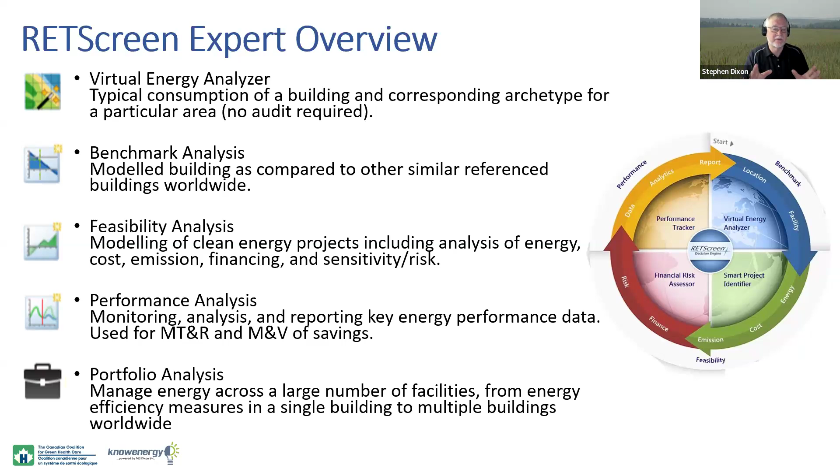It can interact with utility data. It can interact with meters in your building, right? And then it can produce output in many different forms for you, some of them where you hit a button and get a result, or other ones which are completely customizable. You can create dashboards for it.

RETScreen can work with many different project types. A lot of people say, well, can I do this? It's really just a matter of trying to figure out how to use the tools with RETScreen. There are very few projects that I find, over the years, you can't do with RETScreen. Now, it may depend on how deep you want to go.

So maybe I simply want to assess the first pass pre-feasibility of the project. There's probably tools to do that. Then I maybe would hand it off to another person or another tool to go deeper. But in many cases, you can go deeper with RETScreen. So you can do the benchmarking, the pre-feasibility, feasibility, and even the implementation, and then the performance or monitoring and tracking of that project over time.

So many facilities can be tracked, but virtually every different type of system in a healthcare facility is something you can look at quite closely. There are lots of internal databases to make your life easier. There's product databases with equipment and performance characteristics, and there's cost data for those things.

So if you're doing a project, what if I change this to that? Oh, I'm going to pull up a ground source heat pump, an air source heat pump - there are ways to cost that within the tool.

You eventually want to go out and get it costed properly, with cost estimates, engineering, and so on. But to begin with, to get that first pass, does it make sense to do this?

A lot of the data is already in RETScreen. Climate data, how cold or warm it is outside, the external conditions on a long-term basis, which we use for feasibility. Weather data, which is what we use for tracking actual performance month over month. If you're into water power, there's also hydrology data in there. Likely you won't be touching this in a healthcare facility, but it is there.

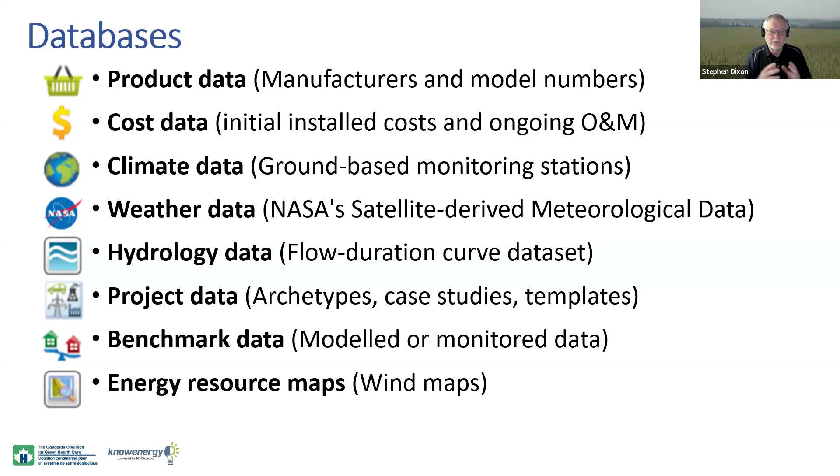You'll definitely want to look at solar, and RETScreen's links to the real-time NASA database for weather will actually help you quite nicely. So lots of resources. RETScreen wants to make itself, and I think has successfully made itself, the hub as a tool, and bring lots of different things together. So it is a big toolkit, there's a lot of stuff in here. If I had more time, I would spend some time with it.

Now, how can you take a quick look at RETScreen? Just kind of look at some of the things I'm going to talk about today. Well, you don't even have to spend a cent to do that. You can go to the RETScreen website - Autumn will be sending some links out afterwards if you don't know where to go, www.retscreen.net. You can download a copy of the latest version of the software, we're up to 9.3 now, and you can play with it.

Now, will you be able to save? No. Will you see all the detailed features? Not necessarily, but you'll see enough that I think you can get a sense of whether it's useful to you. On top of that, Autumn will be sending you a 30-day license for the professional version, which means everything is enabled - you get a chance to play with it, look at it, see what you think, and make a decision as to whether you want to buy it.

So, basically the purchase is about $860 a year subscription, and it can be used by multiple people in your organization or across multiple sites if you've got multiple buildings or sites within a healthcare network. So it can be used in that sense, and those arrangements you can make with RETScreen.

All right, lots of learning resources built in - case studies and templates. There's a place on the main screen down here, it says case studies and templates. You click into there and you get a list of case studies, and there's a little search bar. You can search case studies, which are real projects implemented with RETScreen, or templates, which are examples of things that maybe we didn't find a real project for but created a hypothetical example for - one of those on the right-hand side is a feasibility template for putting a variable speed or variable frequency drive on a fan in an HVAC system.

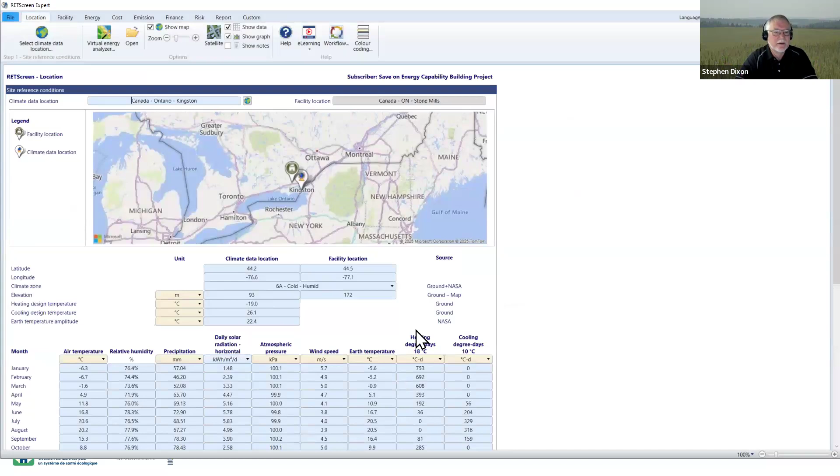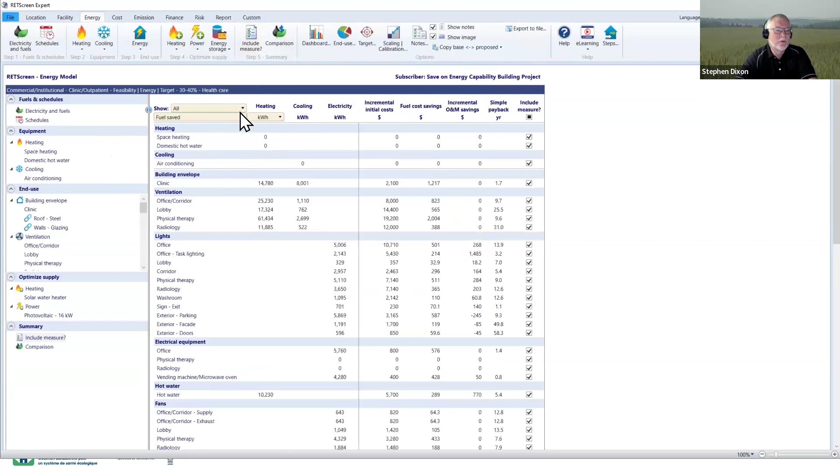So let's say we were looking at the office and corridor HVAC system. We can get into ventilation, and here's a specification of that system. We've got a complete building analyzed, the base case and the proposed case. So every one of these screens, if I click into the building envelope, I have the base case, the way it is today, and the proposed case, the way we propose it to be.

You can play with this and create projects that improve insulation level. In this case, we've increased the solar shading on this facility to reduce heat gains in the summer from the sun. There are lots of really cool things you can do to build out an improved or proposed case. Once you've created your proposed case, you can look at the emissions reductions—in this case, even though it's a 40% energy reduction, it also turns out to be almost a 50% carbon reduction. The green is the reduced carbon.

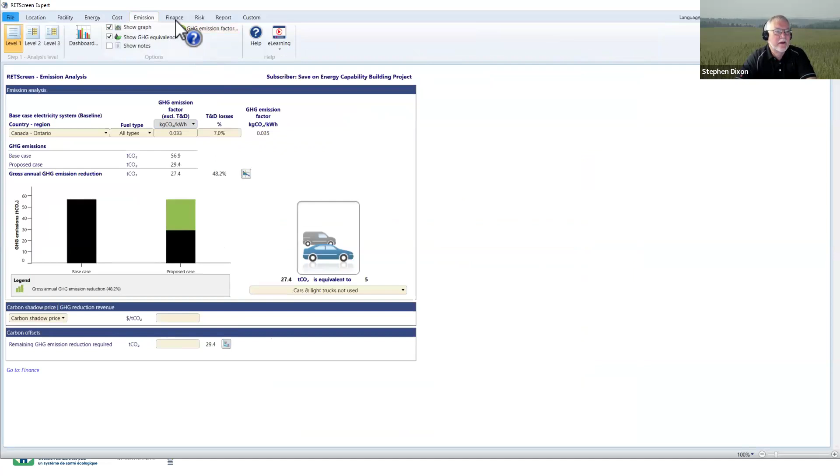Then we can do a very detailed financial analysis, going well beyond simple payback. Some projects really aren't best evaluated with simple payback anymore, so we use present value analysis, where we can calculate things like the internal rate of return or the net present value—or the one I like, the savings to investment ratio.

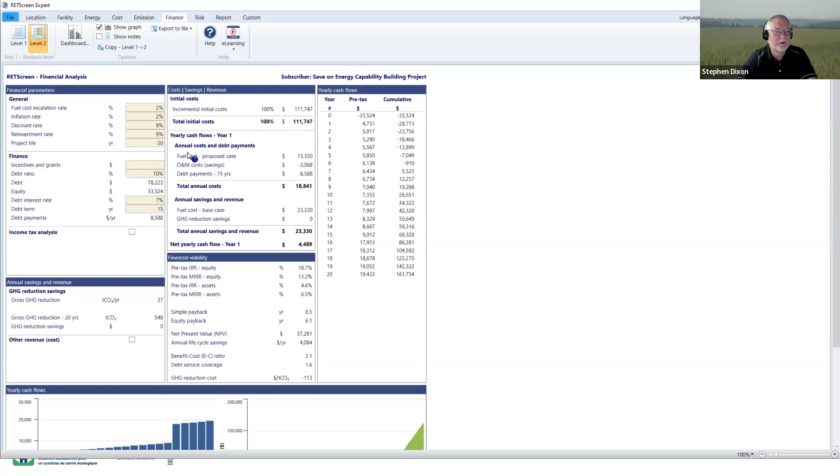If simple payback tells you how long you have to wait to get your money back, the savings to investment ratio tells you, if you wait for the project life—say 10, 15, or in this case 20 years—how many more times as much money as you put in do you get back. The more you get back for what you put in, the better the project is. So it's got some great tools for looking at projects financially.

And then there's a great reporting tool—a predefined reporting tool you can look at, so you can go in and take a look at this project in summary. We don't have it defined here, but there's actually a custom dashboard tool you can use to create your own report, right down to laying things out on the screen in any particular way.

So I just opened it up here, and I can grab anything from my analysis. I'll jump into data and feasibility information, and pull the table of all the measures, drop it in here and expand it—so here we see the table of measures. I can create a customized page, and then a set of customized pages into a book, and assemble these into notebooks as well. So it's a very flexible reporting tool.

So RETScreen does not deal with harmful gases. It does deal with refrigerant gases - it allows you to do an inventory of refrigerant gases, but it doesn't deal with the significant impacts that anesthetics and other gases have on the environment.

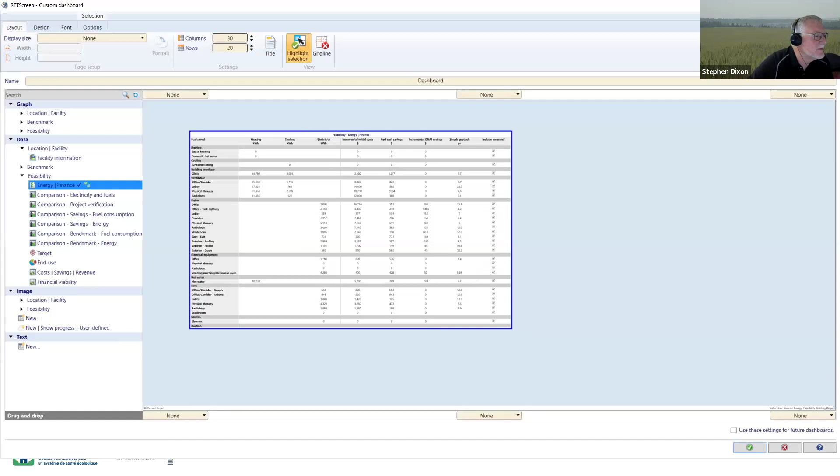So is this just a model? Is there real data measurements input about, say, actual windows? This is just a model, okay, in the sense it's a hypothetical situation, but these are real things.

So what we've done in building these - I built a few of them, there's hundreds of them in here - is they've taken a real building or a set of real buildings, looked at them, and tried to come up with a building that represents the best of the most, and they've used real values that are in here. So these are realistic values in terms of the actual archetype.

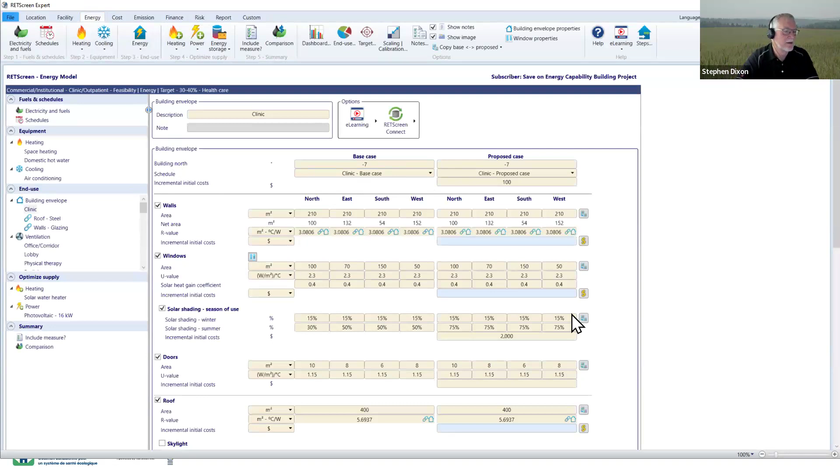So that's a quick tour of the archetype. I wasn't intended to do that, but I think it was useful. So again, if the first pass in, if you want to jump in, virtual energy analyzer, and go for it. You'll learn a lot about what RETScreen can do.

And you can use the archetypes by facility type, which is what I just did, or by measure. You can say, I want to do a particular measure - maybe I want to do heat recovery on a boiler. And so you can go in and pick a particular project. You don't just have to go give me a whole building - you can say, give me a system or a part of a building or part of a system as a project. And it describes the projects that are implemented there in quite a bit of detail.

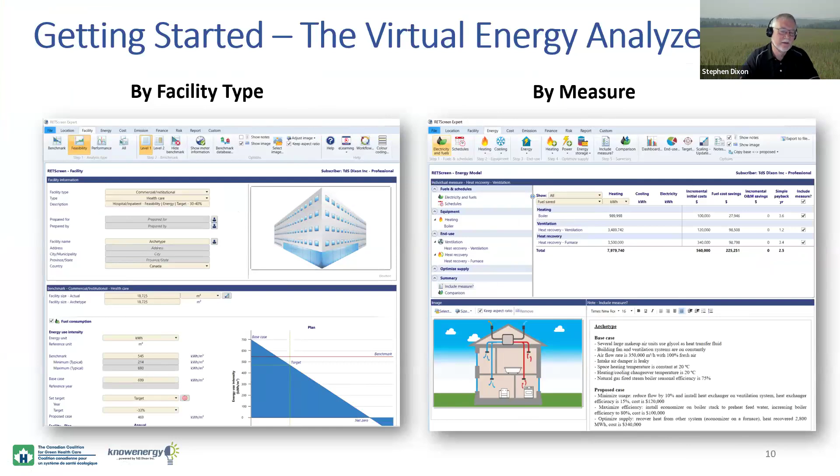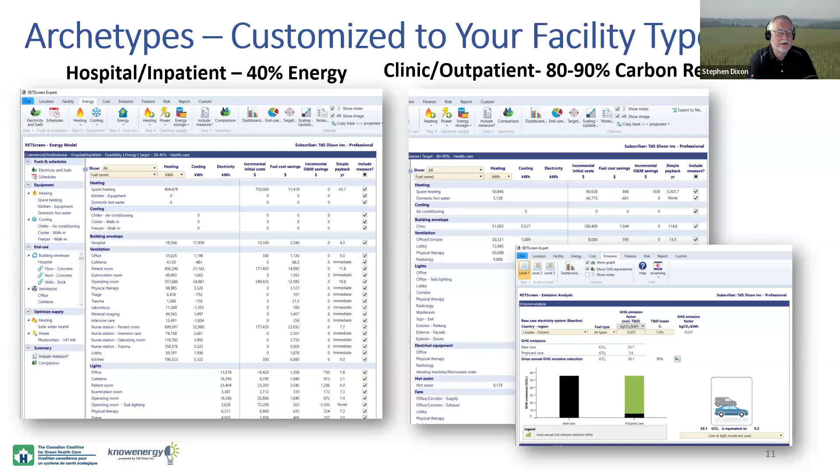Very informative tool. It's an analysis tool, but it's also, to me, a learning tool - how to use RETScreen to do these things in different situations. There's a lot of detail in these things, like we just looked at. The outputs are all there - either 40% energy or 80 to 90% carbon reduction, a very rich set of learning tools.

All right, feasibility. So really that was feasibility, but I'm just going to go through and take a look at some of the things you can do in this feasibility, which is like, what if I change this to that? What if I change this hallway or corridor lighting to this corridor lighting? We know we can improve the conditions, but what happens to the lighting level in the facility? What's the energy impact? This actually has a lighting level calculator built into it.

And it also allows you to show the impact of the change in lighting on the heating and cooling systems in the building. So it deals with all those types of interactions if you build out the building around this thing. You don't just do the measure in isolation - you could, or you could do the measure within the context of the building.

And honestly, when we go to low carbon, we have to think about, as we take heat out of a building by putting more efficient lighting in, it takes heat out - there's not as much heat given off by those more efficient lights. We have a cooling positive impact, but we have a heating negative impact because now the building has to provide more heat by the conventional heating systems. So if we're trying to get to low carbon, lighting retrofits can actually work in the wrong direction depending on where we are in this country and the relative carbon impacts of electricity and the fuels that you're using.

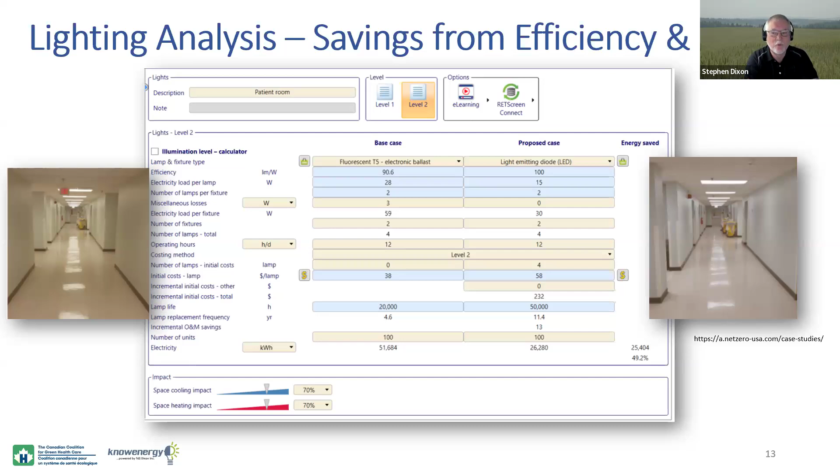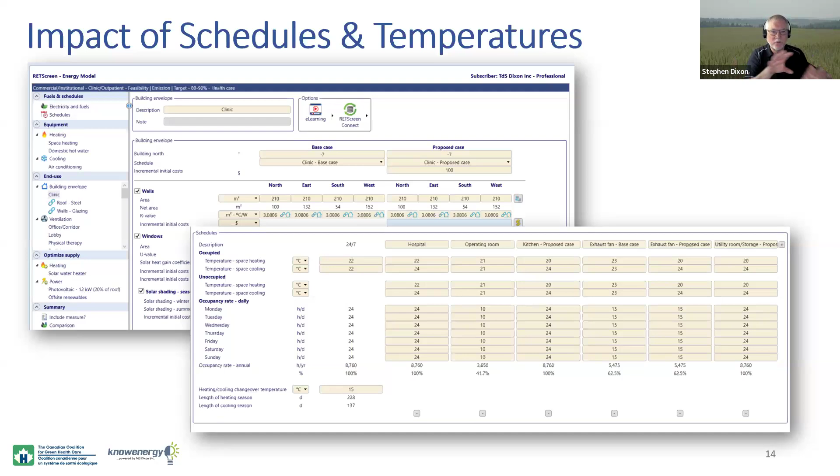You can actually put all your windows in one building envelope, all your walls in another. RETScreen is very flexible in how you account for things. A lot of people will try to call this a simulation program, but it's really an energy accounting program. It accounts for where the energy goes, and what can be improved by making changes in those areas.

We can look at more detailed ventilation systems, and we can look at the impact of upgrading dampers or adding heat recovery to a system.

One of the projects I like to do if I have more time in a webinar is to actually run through an example like this. If you go into the building envelope model in RETScreen and click on the video help, you get a little video where we do this. So there's a little incentive to go have a look. But basically, in about 5 minutes, you can calculate the savings for upgrading the roof insulation in a building when you're doing a roof upgrade.

What I mean by that is, if we're doing the insulation when we have to upgrade the roof anyway because of the life of the roof, then we don't have to bear the full cost of the insulation on the energy project, only the marginal cost of going to the better insulation.

That was actually a little project that came out of a workshop I was doing years ago. There was a gentleman in the workshop on his phone at the back of the room, and he says, Steve, you're talking about RETScreen — I've got my roofing contractor asking me right now whether I want to put 4 inches rather than 2 inches on the roof he's redoing for us on the west wing of the building. He said, should I put the 4 inches on, or could that software tell me whether there's any benefit? So we actually did the calculation in the room as he was on the phone with the contractor. I gave him the answer, he bargained a bit with the contractor down from their price, and they actually did it.

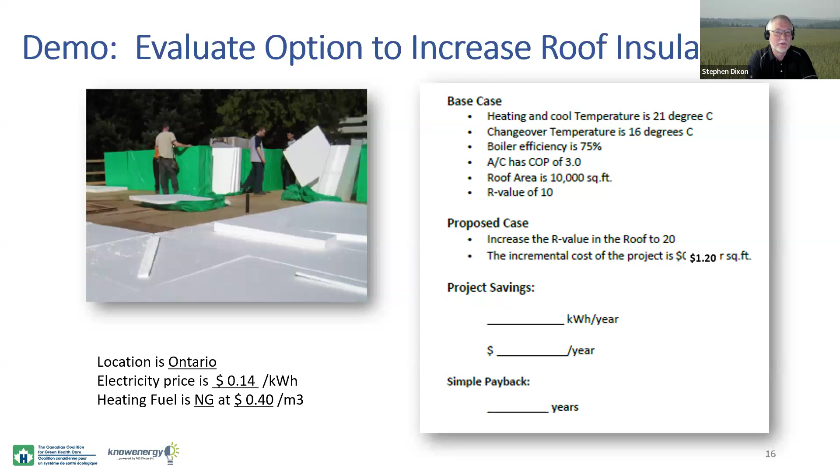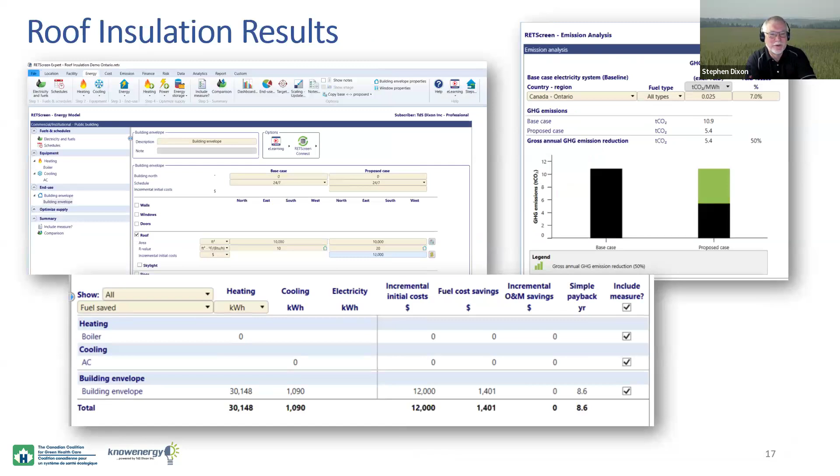So making smart decisions, RETScreen is a tool that can rapidly help you do that. So there's the results of that — an 8.6 year simple payback. But when you think about it, if that roof's going to last for 20 years, why don't we do it then? And if you know what you're going to save, maybe you could bargain or negotiate a little more aggressively too, knowing that even if you don't make your goals in the negotiation, you still have a reasonably good project.

Maybe you want to change a rooftop unit on the east wing of the offices in a particular clinic to a heat pump, an air source heat pump, from natural gas. RETScreen has the tools for doing that. There's actually two ways to do that in RETScreen. You can do it as part of what we call the energy feasibility models, and you can model a hybrid system, which goes from natural gas to electric heat pump as the base load and peaking with natural gas.

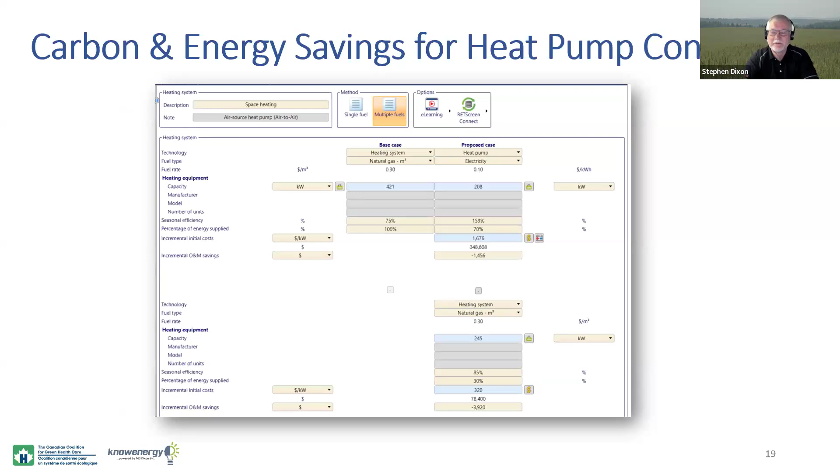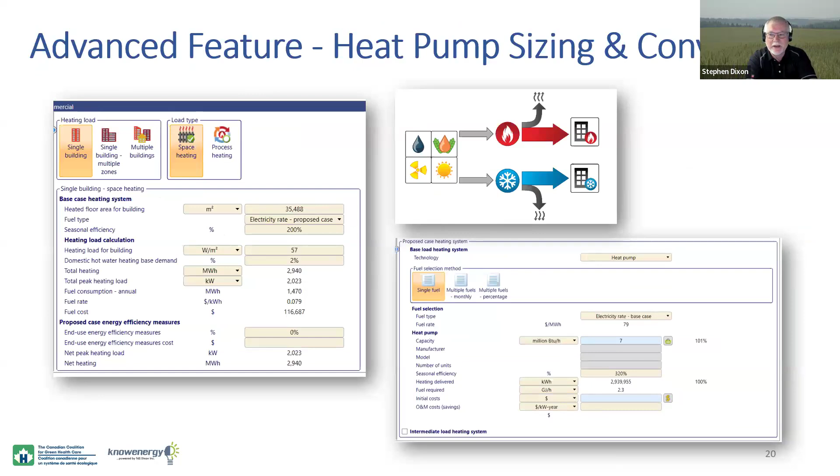That way you can take advantage of the fact that most of the year the heat pump will meet the load at very low emissions, depending on where you are in the country. And for those peak times, the natural gas system comes back in. What we often see when we do this in what we call the power heating cooling tool, where we can assess the actual loads, is that the heat pump system can meet 90 to 95% of the load — which means 90 to 95% of the carbon reduction. That 5%, a very short period of time that the gas has to kick in, is not a big giveaway. So you're getting a huge chunk of energy and carbon reduction for maybe a more modestly sized heat pump, which doesn't have to meet those peaks. So, great tools for sizing and estimating the outcomes of doing heat pump conversions.

If you want to look at variable speed drives, I love these. I always say in a hospital, take me to your least efficient or reliable pump. I remember one situation where pumps were being throttled. Variable frequency drives on pumps, appropriately applied, attract good incentives — they really do across the country — and they produce pretty significant energy savings and reliability improvements for those pumps, because you're no longer throttling them.

Less wear and tear on the pump. RETScreen has the tools to do that, whether it be on a pump or even for a fan, a little more complex than a pump, but the tools are there. Pump is pretty straightforward. With a fan, it depends on the type of fan blade you have and how you're dampering or restricting it. With a pump, you simply throttle it or you don't. Whereas with a fan, it gets a bit more complicated. But RETScreen has the tools to do that, and videos to take you through both examples quite nicely.

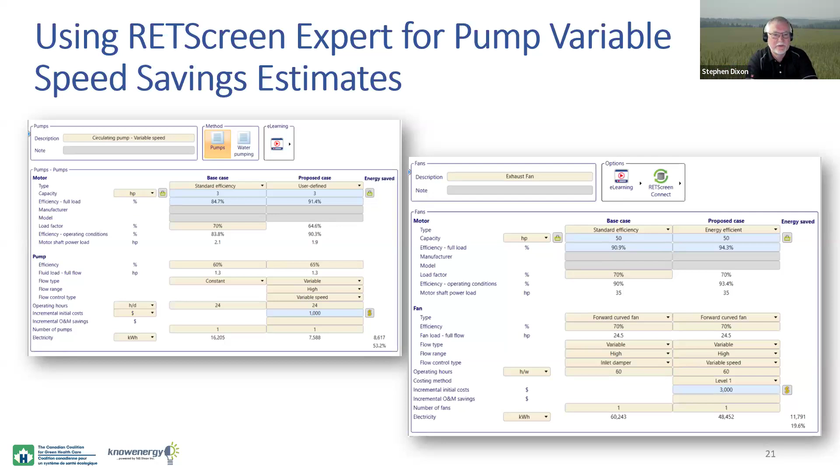If you're a technical person using RETScreen, you may not be the next person who's going to open up this file for this building. Maybe you're going to pass it on to another person. Well, RETScreen has lots of places where you can make notes, and you can create a lot of documentation around the building. If you open up the archetypes, they've used notes pages, picture pages, and diagrams to document their file. You can do the same thing.

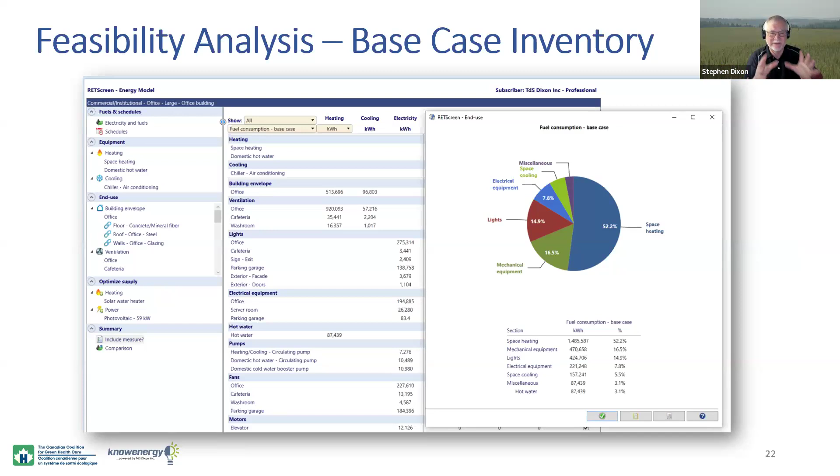So it's not just a technical tool for calculations, it's also a good project management tool, allowing you to capture all the relevant information.

And then you can start to look at the opportunities. You can see the impact of each individual opportunity here. We assess this with simple payback, but once you've picked a basket of opportunities you like, since you can turn on and off different measures in the building, you can take that basket forward to the full financial analysis and look at overall impact on carbon reduction. Then we get our financial analysis in detail. So it's kind of a step-by-step process.

There's a little graphic in RETScreen somewhere which shows you what that process is, but it's pretty logical. You simply follow the toolbar across the top of the software, and it will lead you through that.

Can you import building elements? There are tools for importing building elements from other inventory programs. Can you input real measurements, there is a way to import real-time data into RETScreen. You can add any measurement into these fields, so whether you come up with a number by looking at it or by measuring, you can put that in there as your input for systems.

You can't connect meters directly to the feasibility tools, but there is a way to bring real-time data from even basic meters online right into the tool. I actually use it to monitor my own house. I've got a thing called a hydro monitor on my service entrance, and hydro has an API that RETScreen connects to. I can pull the data from that into RETScreen and then view it and do my further analysis there.

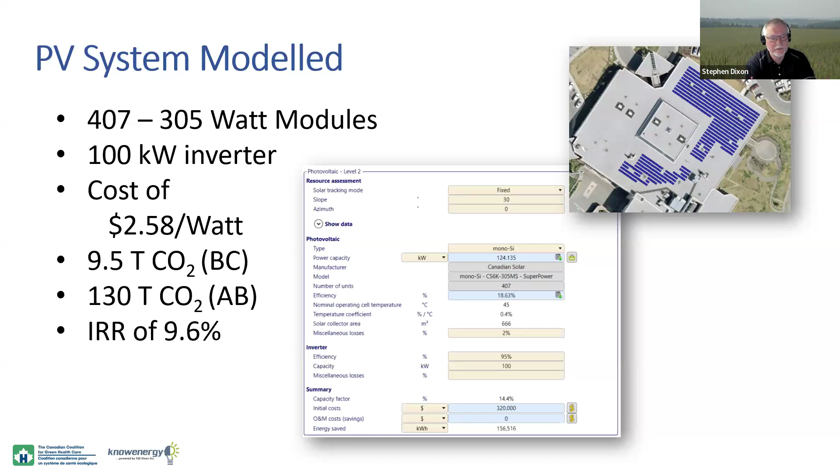Solar panels, solar air heaters. There's an example from Flin Flon. The brick on the outside of the hospital was failing, aging, so it had to be reclad. Why not put a solar wall on the outside?

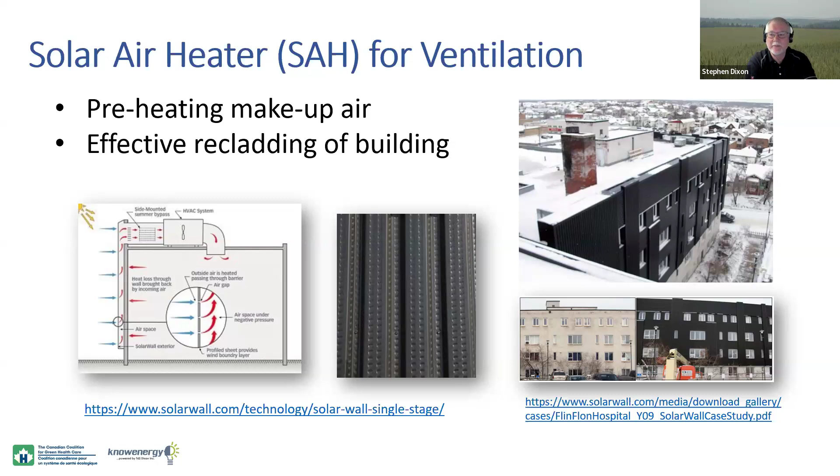Then you think, wow, that's a long way north. But you know what? The sun in the winter is much more horizontal to the horizon the further north you go in the world. So that actually makes for very good conditions for collecting heat behind a solar wall and then using that to offset the makeup air that you have to bring in. In a hospital healthcare environment, you've got a lot of makeup air to deal with.

So there's a great way to offset some of that heating of makeup air. Again, the model takes into account a lot of real situations from the actual real data from the particular equipment, and you can pull up a standard piece of equipment. You can even specify the color. If that was a green wall, you could specify green and it would change the performance characteristic of that.

And you can deal with the operating schedule throughout the year and what is the fuel that you're actually displacing. In that case, they had both number 2 oil and natural gas boilers. That would displace 59 tons of CO2 if you're heating with number 2 oil, or 40 tons of CO2 with natural gas boilers. That's just a reflection of the carbon associated with those different fuels.

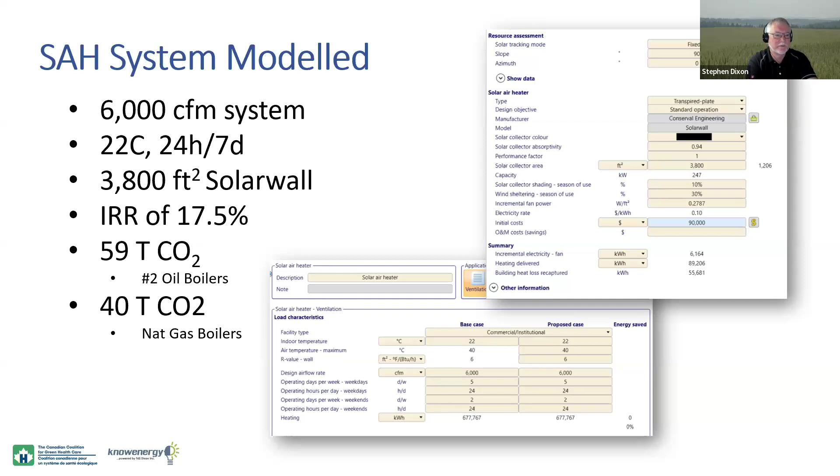Geothermal, right? Digging into the ground and getting heat. The case study I've highlighted here is interesting to look at if you have a chance afterwards. You'll get the slides, the links will be active. Have a look at this, because what's important here is that digging into the ground and getting heat is a good thing, they say, but it's much cheaper to recover internal heat first versus digging into the ground.

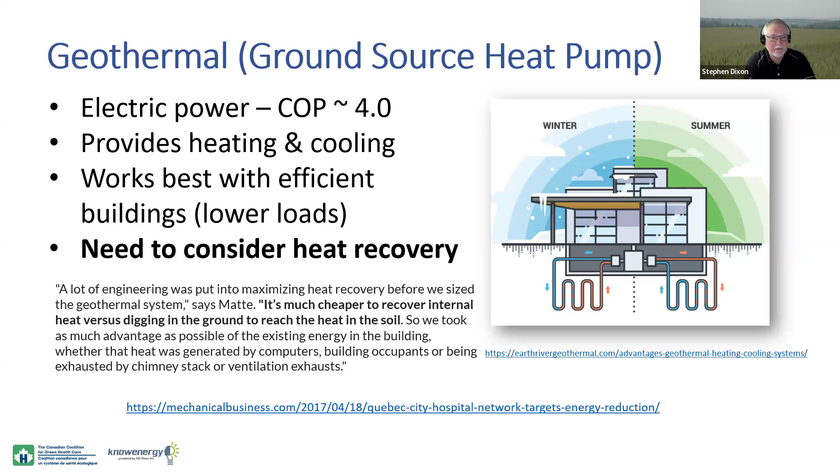So what they did was both. They took advantage of as much heat recovery within the hospital from the conventional systems to reduce the loads, before they actually did the heat pump. So basically you're building out, in a sense, a hybrid system again. You're using all of your resources and using RETScreen as a tool to be able to do that. So that's modeled in there. You can have a look at that quite nicely.

Again, there are archetypes, case studies around all of these types of systems. All right, that's feasibility. What if I change this to that? Well, what if I've changed this to that? How do we know how it's improved?

For this, we use what we call performance analysis. Performance analysis is essentially taking data, whether it be historical data or real-time data coming in, and actually analyzing it in a way that you really understand how your performance is changing. RETScreen has two very powerful tools in its performance tool set. One's called regression, and you've probably all heard that's a fancy name, but what it means—you remember back in school you did y equals mx plus b, a line, straight line relating a y variable to an x variable.

In building science, it turns out that in almost every case there's a linear relationship between the energy required and the outside conditions. RETScreen allows you to create these statistical models, fairly basic, y equals mx plus b, predict how much energy you would use, compare it to what you actually did use, and do a sum of the difference.

We call it a fancy word, a CUSUM, but it tells a story about what's changed in a building. I want to stress that consumption is not performance. Consumption is simply what you use. Performance is consumption with consideration of the influencers. So consumption of energy on the y-axis, the weather on the x-axis, y equals mx plus b, that's a performance relationship.

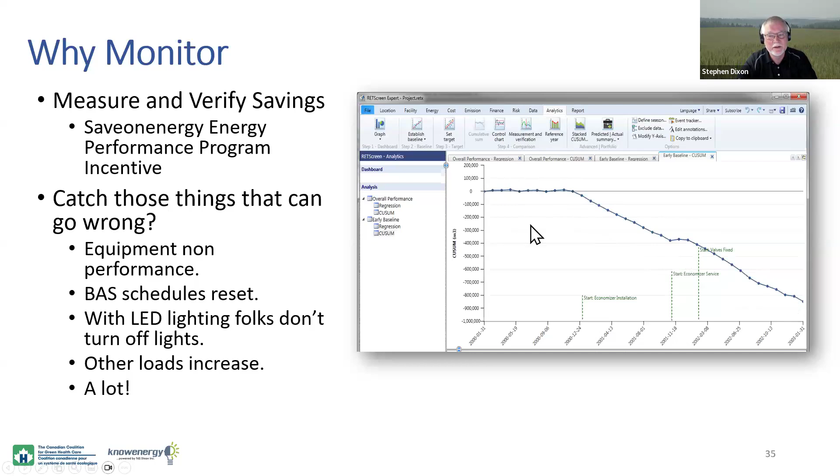Eventually it gets bumpy, and you have to ask yourself, what's changing here? Whenever the slope of a CUSUM changes, something has changed. If it goes up, it's bad; if it goes down, it's good. This piece here is bad, it's actually going up, because if you're trending along here, that's equivalent to an upturn. You're going back to your baseline condition, which is not what you want. You're not getting any savings. So it's a very useful tool in spotting changes in performance.

RETScreen has the tools to do that. You can go from a data set which you can import electronically from Portfolio Manager, or import from a spreadsheet, or hand it in manually if you want. I know Service New Brunswick, Cape Butler and company down there, they use RETScreen on the hospitals. They use Portfolio Manager that collects the data, then fire that over - Brent with the hospital sector fires it over into RETScreen and does the more detailed analysis.

You might have data in a SQL Server somewhere. You can pull it directly out, or pull it via green button from your utilities. And you can pull monthly, daily, hourly, or even minute by minute data.

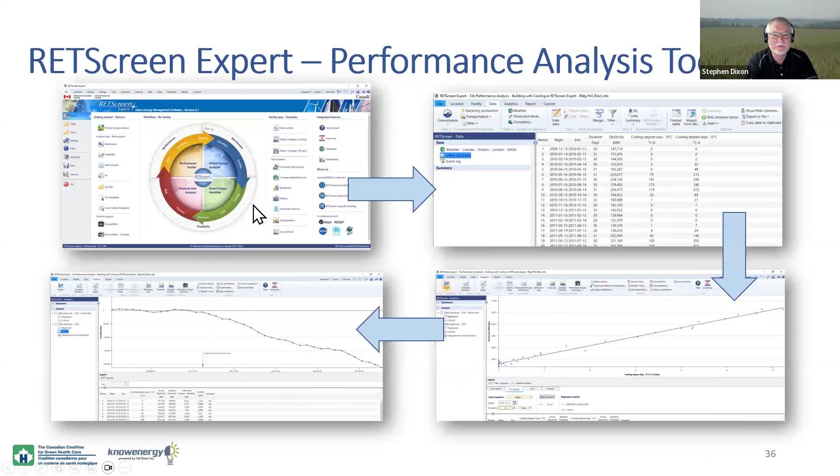So very, very good tools for visualizing and using this information. We did a webinar recently working with a municipality that had a large regional healthcare clinic, and we produced these graphs. There were anomalies, weird things happening. The gentleman in the session took a screenshot of the graph I'd created using his data.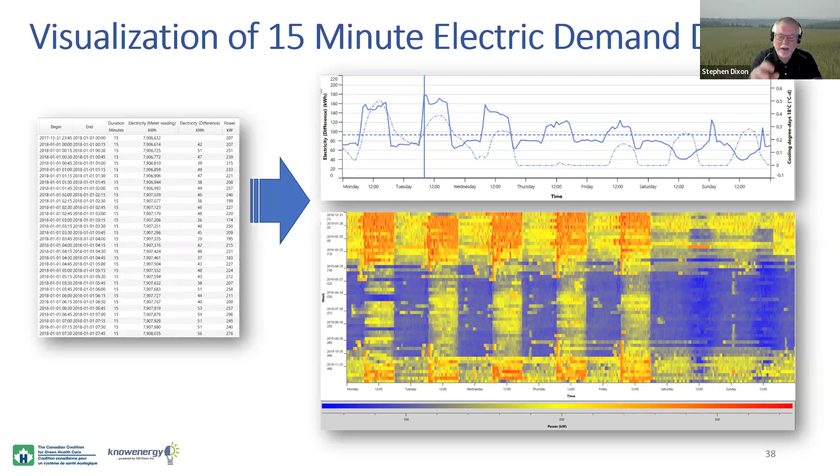He went back to a facilities meeting a little while later to find out what was going on, and the results were interesting, not completely resolved yet. But the point is, this type of information can drive opportunities, because if there are anomalies, you've got to explain them. And sometimes when you explain them, there's a peak demand in a building towards the end of the day.

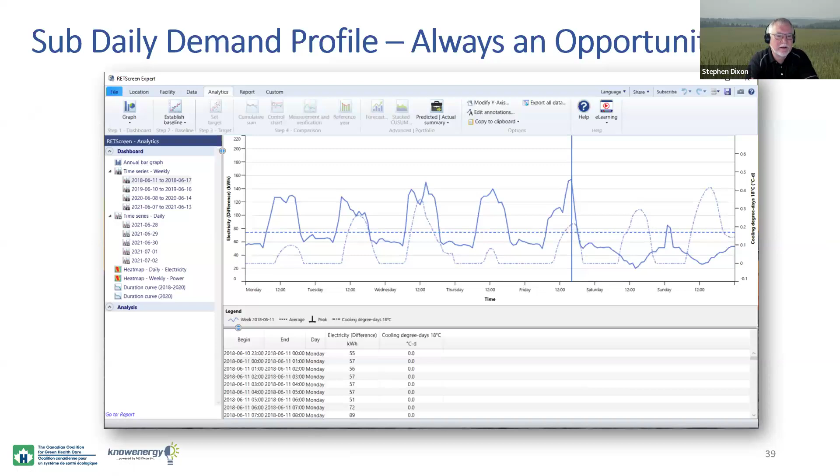Here's another example - this is a compressor system, basically a multi-stage chiller that was cycling very, very heavily. That's not good for the equipment. So the chiller wasn't staging properly.

Here's an example where you had electric heat and electric cooling in a building. On a summer day, when they put the office area into setback towards the end of the day, the electric heat kicked in to raise the temperature to the new set point - not what you want, simultaneous heating and cooling.

I've never seen one quite as amazing as that, but it was a huge opportunity. That actually drove them to use some AI to keep tabs on those systems, because it had happened before and they didn't realize it came back.

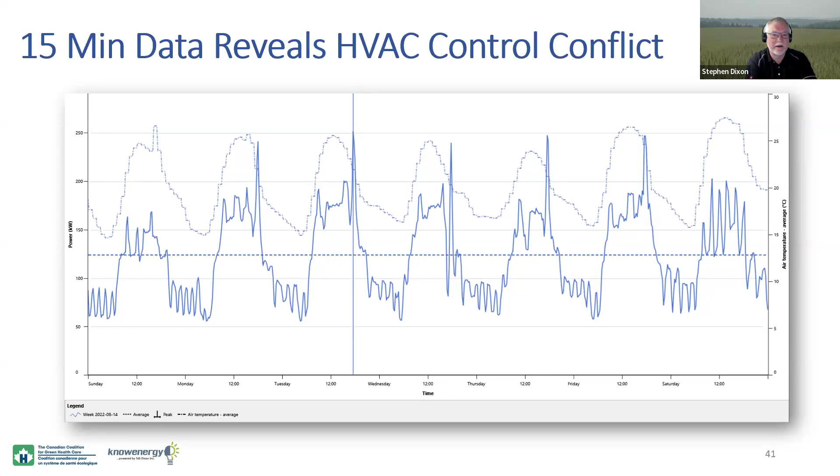With RETScreen, 10 minutes with the data and you're able to identify that opportunity very quickly. And if you're looking at conversion or electrification, understanding your hourly consumption of gas speaks a lot to your hourly loads in your system, which is what you'll need to size that new electrified heating. RETScreen can deal with hourly gas interval data as well.

Thanks. Okay. Oh, great. So, yeah, Giselle, I'll send you the Excel file.

Can you import baseline building data into RETScreen from other modeling programs? No, you can't do that per se, but you can bring in some of the data for the buildings into RETScreen. There's the heat map for gas as well.

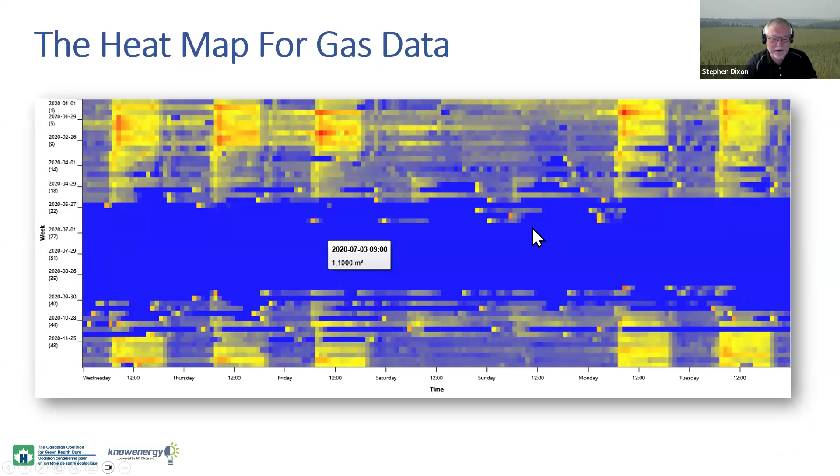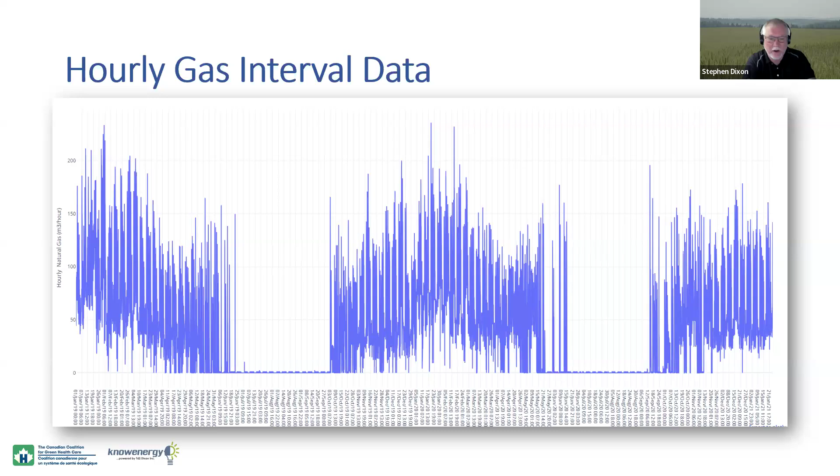That shows you the peak times - remember I said the peak times are only a short period of time. So do you size for this up here, or do you size somewhere down here? Your heat pump deals with 95% of the energy, and those peaks are met with the gas, so you have a much more modestly sized heat pump. Using these tools, you can very quickly visualize and get an idea of what the opportunity is there.

All right, so we're going to move on to portfolio analysis, looking at a whole collection of buildings. The portfolio view is pretty simple - every line is a different facility, but it could also be a different department in your facility. If you have sub-metering within your facility, you could break it up that way and have a separate file for each department.

And then you can filter and pick and choose, create groups and different things for reporting purposes. You can very quickly do benchmarking. I love this graph. This is a benchmarking graph.

On the x-axis here, we have facility size, and here we have greenhouse gas emissions, or tons of CO2. Every dot is the base case for one of my buildings. Every hollow dot is the proposed case. So what we've done is looked across the portfolio at where the building is today and where it could be, the proposed case. We've determined what the CO2 emissions are, and we put that on a graph.

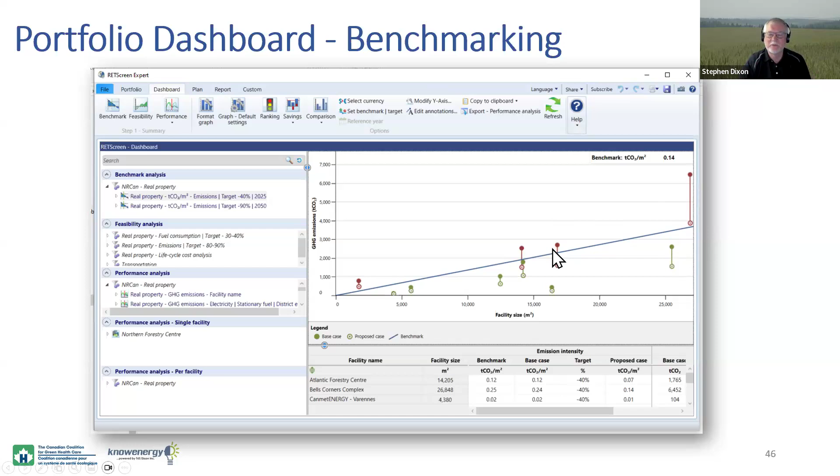So this is a relative measure, tons of CO2 per meter squared of floor area. That's the benchmark line. Any building that's above the benchmark to begin with, or any section of a building, comes in as red. Anyone that starts out below is green, but it allows you to see how effective your projects can be. You can report on a whole portfolio of projects this way.

The custom dashboard tool has some really interesting pictures here. I showed you very quickly earlier how to create the custom dashboard itself. You go in there and pick and choose the different information, drop it on the canvas, but they can become very, very powerful and informative graphs. That's the kind of thing.

They even have a kiosk feature in here. Just think about the elevator in a building, you've often seen it has the financial reports. Well, why don't you have a monitor somewhere that has reports on the sustainability or efficiency of your hospital and how much carbon is being reduced? Have these kinds of status screens come up, that's the way it's designed. RETScreen has a full screen kiosk tool feature built around the custom dashboard, really useful for spreading this information far and wide.

Now, Portfolio Manager. There's a bit of doubt and uncertainty out there about what's going on with Portfolio Manager right now because of things south of the border. But RETScreen has two ways to get your data out of Portfolio Manager: one is with a spreadsheet, and one is with what's called an application program interface. That actually comes with an automatic update, so every time you go into your portfolio, it'll go out and pull the most recent data from Portfolio Manager.

Once you've got your portfolio, you can take the reporting well beyond what's available today. Even with the reporting Portfolio Manager has, you can go well beyond that with the dashboards in RETScreen. So pull your data in, if you've got a Portfolio Manager portfolio, apply for it.

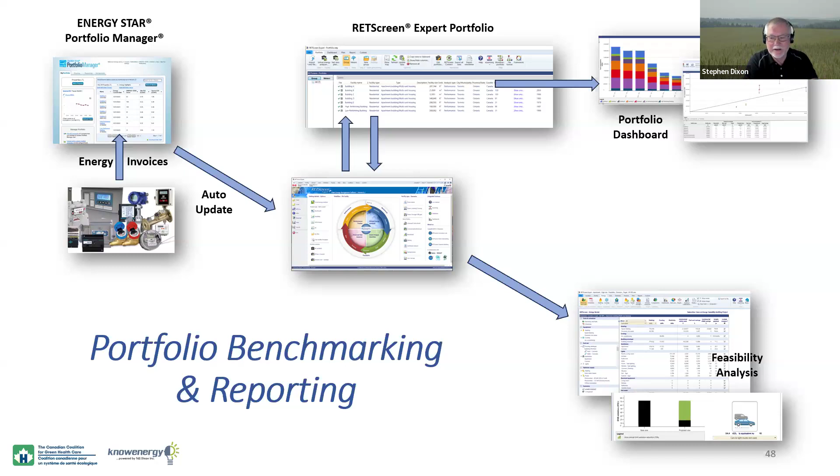Absolutely, yes. Feel free to send me an email afterwards with any of these questions for more clarification. I'm more than happy to even do a quick little meeting on Teams or Zoom, where we can go into more depth. So my goal today is not just to present this information, but to give you an opportunity to go well beyond this, to pick up this tool, use it, and if I can help you do that, that's really what I'm about. Actually getting data from Portfolio Manager is as simple as a couple of quick clicks.

In Portfolio Manager, you may have a username and password. This is the sample we set up a little while ago. You tell it where you want to put it, click OK, and it chunks away and builds a portfolio. Then you click update data and select auto update, so I can set it for once a day, once an hour, or once every 10 minutes. It'll go out to Portfolio Manager, bring that data into RETScreen, and update your portfolio and all your graphs automatically. Very, very powerful tool.

Even with uncertainty at Portfolio Manager's end, there's still a lot of value in using Portfolio Manager and RETScreen together. I always tell people use the best of both, and that really is the partnership between these two tools.

You can actually generate this graph relatively quickly after doing an import from Portfolio Manager. That's my favorite graph, the benchmarking graph. In this case, it's fuel consumption, but it could be greenhouse gas emissions, because RETScreen will deal interchangeably with those things simply by applying the correct factors that are all built into the tool. It's very adept at dealing with these things.

How does RETScreen compare to other energy modeling software? I'll be very honest, RETScreen is not an hourly simulation. So your eQUEST, CanQuest, EnergyPlus, all those tools are hourly simulation tools. They require a lot of skill, a lot of data, a lot of information, and a lot of time to use. RETScreen typically is either a monthly or an annual calculation.

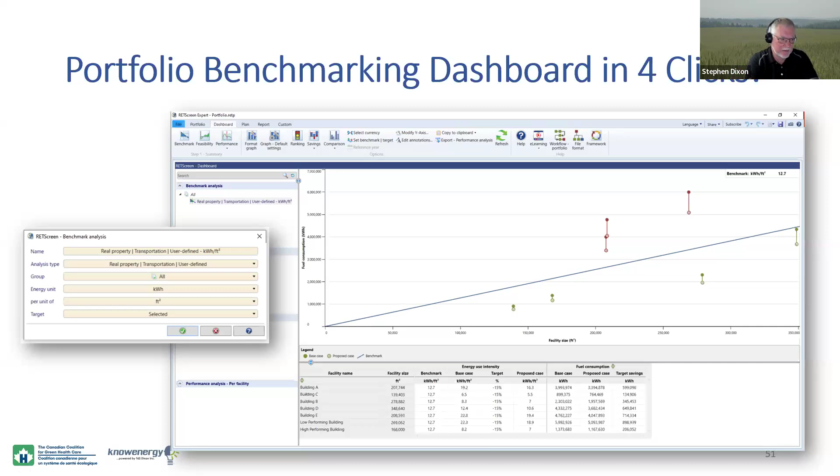All right, going a little further here - another picture, some of the dashboard views. This is 7 different buildings all stacked up year over year in terms of their performance. The dashboard reporting tools, honestly, just go and look at some of the samples in RETScreen. If you want to have a look at those things, I'll show you where to go. If you go into my portfolio here, there's a bunch of samples, and they are beautifully colorful.

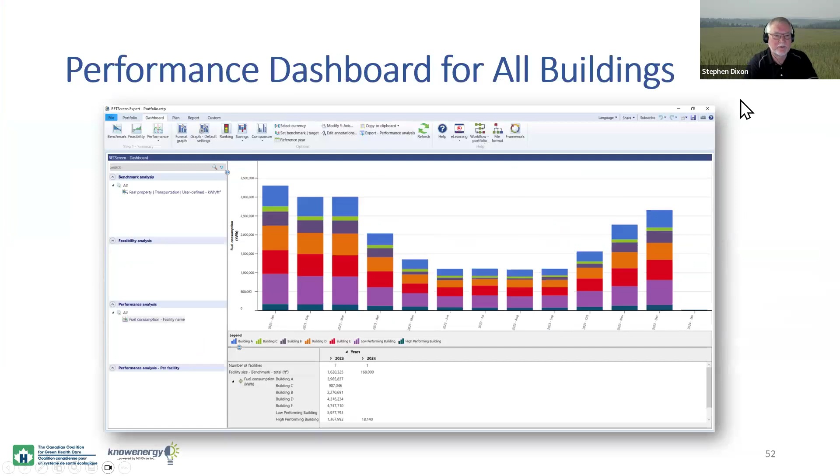Now, the Net Zero Planner - what is the Net Zero Planner? It's a tool that uses the archetypes and allows you to give it direction in 10 different areas to set up a portfolio. There's a great video on this, so I wouldn't do it justice in the 2 or 3 minutes I have left to go through it, but have a look at that video because it talks about how to use it.

So if you have 2 or 3 or even just one facility, it'll go through and basically apply a strategy: where do you start in terms of emissions? What's your baseline energy? What do you anticipate as a cleaner grid? Are you going to be disposing of any facilities? What energy efficiency measures are you putting in place? What strategies are you going to take when it comes to electrification and heating? How are you going to apply on-site renewables - how much of the roof area, ground mount, and so on? What off-site renewables could you purchase, so contracts for green energy? What carbon offsets could you use? And then what financial analysis do you want to apply to this?

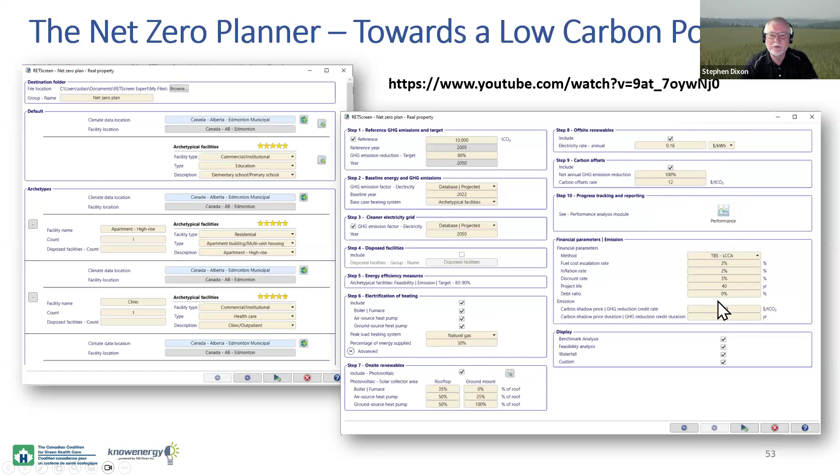What it will do then is go through systematically, apply those factors, and develop for you, either for one building or a whole portfolio of buildings, a strategy and a result. So it shows here, okay, here's our reference period, here's our baseline year, 2022. The cleaner grid is going to have some impact over time.

These are built around either a particular building that you can start with or the archetypes that are in RETScreen. So it's a great way to start to visualize what the future could look like. Getting to net zero is not going to happen overnight. We need to think about the pathway there and understand the importance of efficiency or waste reduction in addition to electrification and renewables.

It's interesting, I've seen some jurisdictions recently pulling back incentives around some of these things and pushing more incentives towards others. And when you think about it, it makes a lot of sense. So: waste, efficiency, and then supply. That's my mantra.

So in summary, it's an all-in-one project tool. Everything's there you need as an energy practitioner. And it's even useful for those that aren't energy practitioners to go in and look at some of this stuff. Like I said, you could download it, you don't have to buy it. You have access to a lot of the features that are in there. Have a look at them.

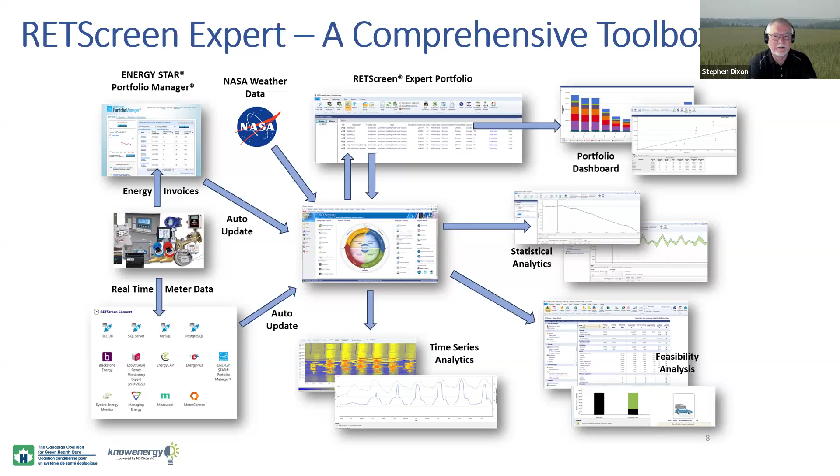As time moves on, RETScreen has demonstrated to me that they are committed to making more and more connections with other tools out there. So where RETScreen can't do something, they're not going to try to invent it—they're going to leverage what exists and work harmoniously in this framework. So have a look at it. It's a powerful tool, it'll simplify your life.

Things like having all the databases there when you want to do a simple what-if, right? Standardization, all the factors—somebody asked about the factors, the scope 1 and scope 2 emissions and so on—those are all built in here. And I even know people that ask their vendors to make proposals in RETScreen because it normalizes the presentation, and the assumptions become more uniform, more standardized.

It's got persuasive tools, there's no doubt about that. To me, the CUSUM from an analytic perspective is one of the most persuasive tools. Other people have other ideas, but good graphics are great ways to demonstrate the value of anything you do, including NPV, IRR, benefit-to-cost ratio. Energy efficiency is not a cost, it's an investment in the future. And RETScreen allows us to demonstrate the value of those investments, both from a financial and from a sustainability perspective.

It's a great persuasive tool, and it's interoperable, as I've said many times today. It works with a lot of other different software, and it works quite nicely. I didn't mention that even if you don't use Portfolio Manager or the API, you can simply export your whole portfolio to a spreadsheet and bring it into RETScreen. So there are ways to do that relatively easily without even doing the automatic links.

You will get a 30-day license—I think as of Autumn you'll apply for this and licenses will be sent out to everybody from RETScreen. You can download it at www.retscreen.net. And the help desk is now open, and I'm more than happy to answer your questions. I want to hear about your challenges, I want to hear about your situations. The quid pro quo is I learn from what your challenges are and how you want to apply it. If I can come up with a solution for you, I learn, you learn, we all gain.